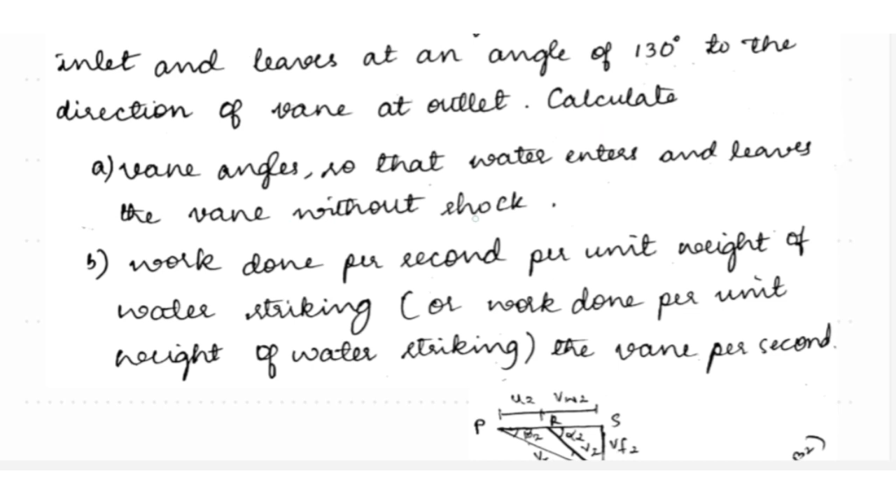angle of 130° to the direction of vane at outlet. So here two angles are given, so that indicates this is unsymmetrical. So you calculate first the vane angles, so that water enters and leaves the vane without a shock. Second, what you have to calculate is work done per second per unit weight of water striking the vane per second, or work done per unit weight of water striking.

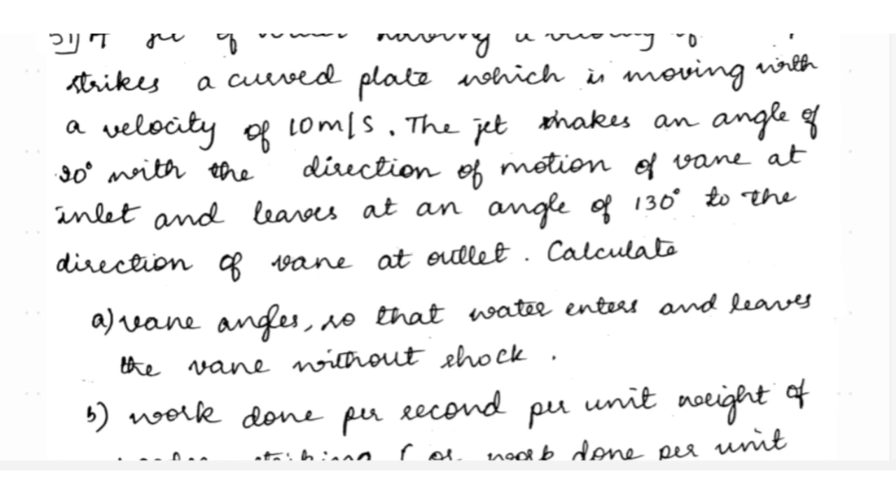So this is the question. What you have to calculate initially is the vane angles, then you have to calculate work done per second per unit weight of water striking.

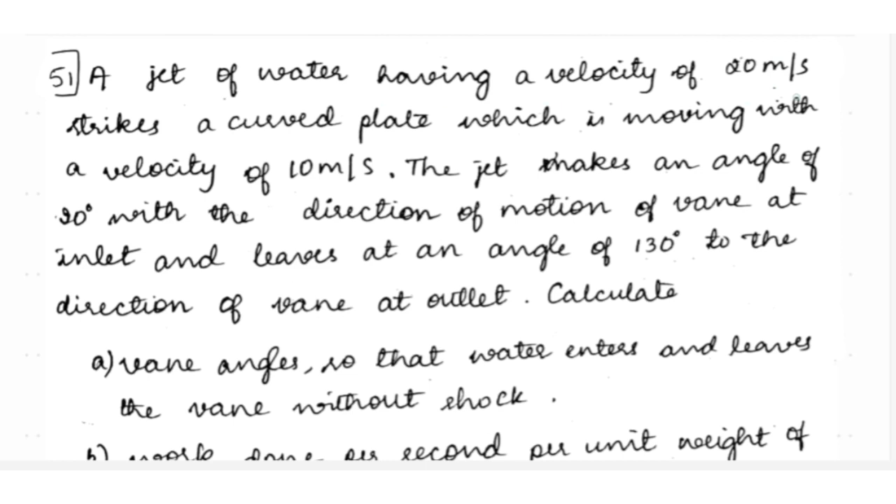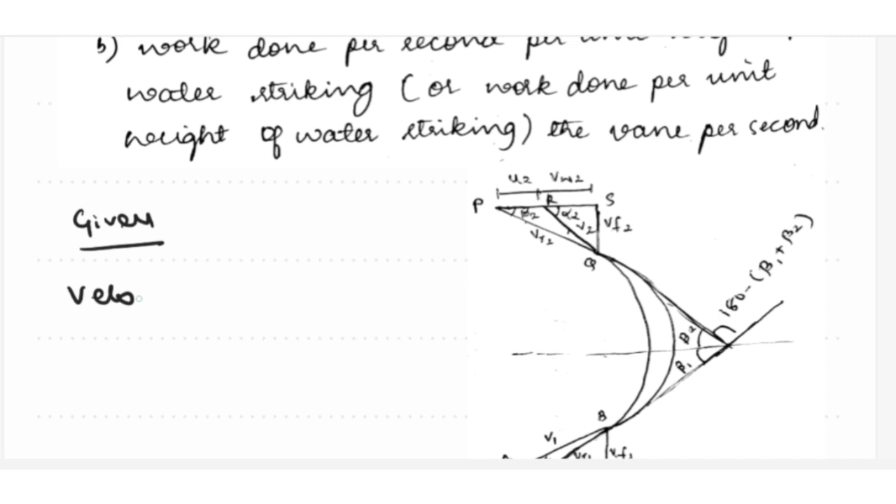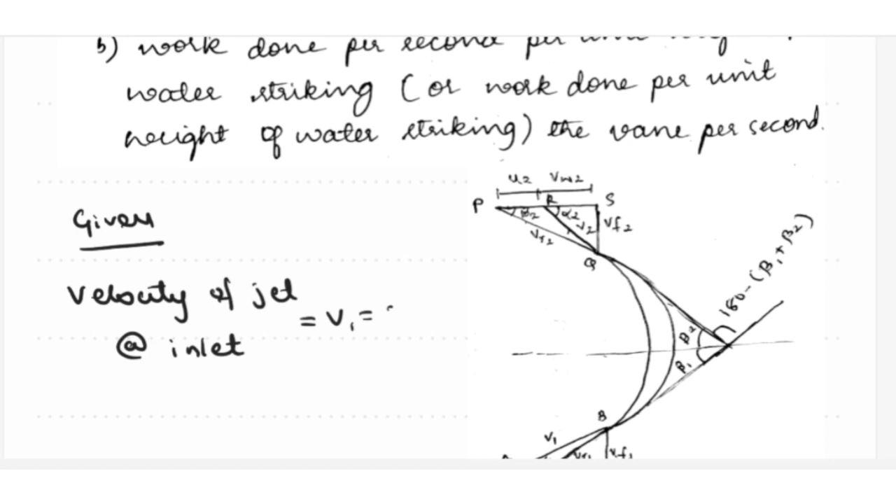So let us write down the given data. A jet of water having a velocity of 20 meter per second - this is nothing but the velocity of jet at inlet. So we can write here: velocity of jet at inlet, V1 is equal to 20 meter per second. It strikes a curved plate which is moving with a velocity of 10 meter per second, so that is the velocity of plate.

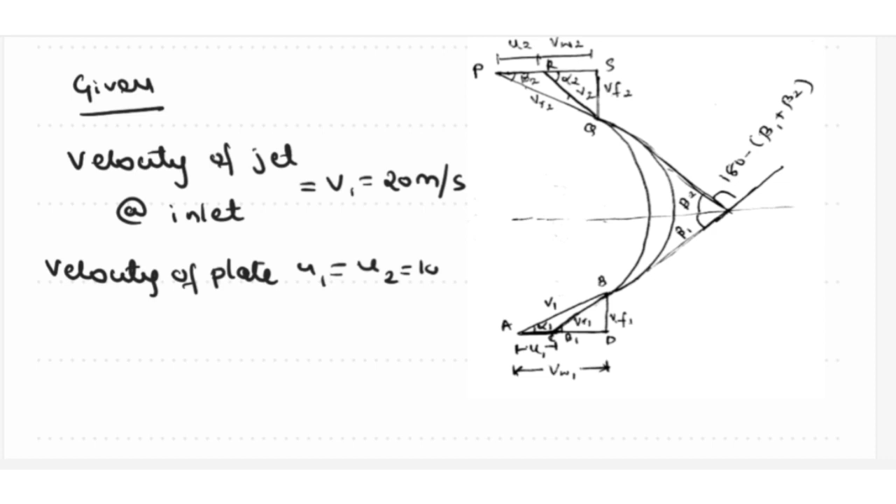Velocity of plate at inlet and outlet will be same, that is what we assume. So we can take it as velocity of plate, that is U1 is equal to U2 is equal to 10 meter per second.

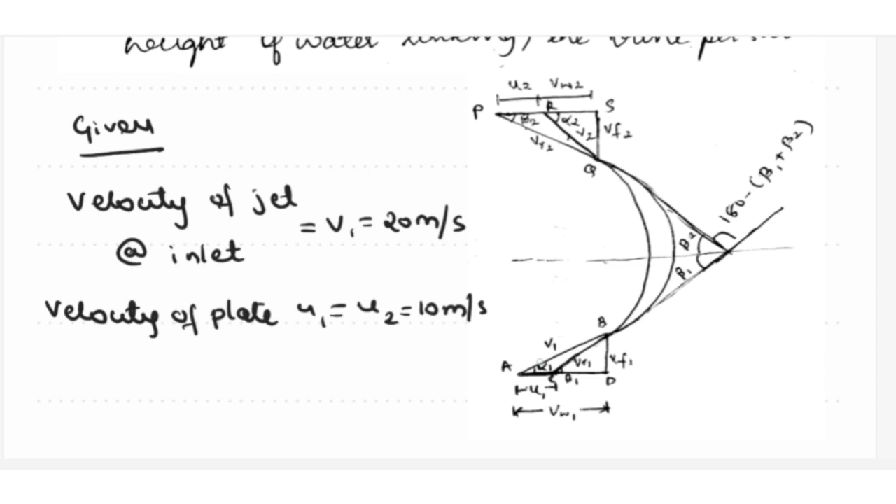The jet makes an angle of 20° with the direction of motion of vane at inlet and leaves at an angle of 130°. So what is this? The jet makes an angle of 20°, so this is nothing but the V1 velocity of jet. It makes an angle of 20° with the horizontal, so that is nothing but alpha 1.

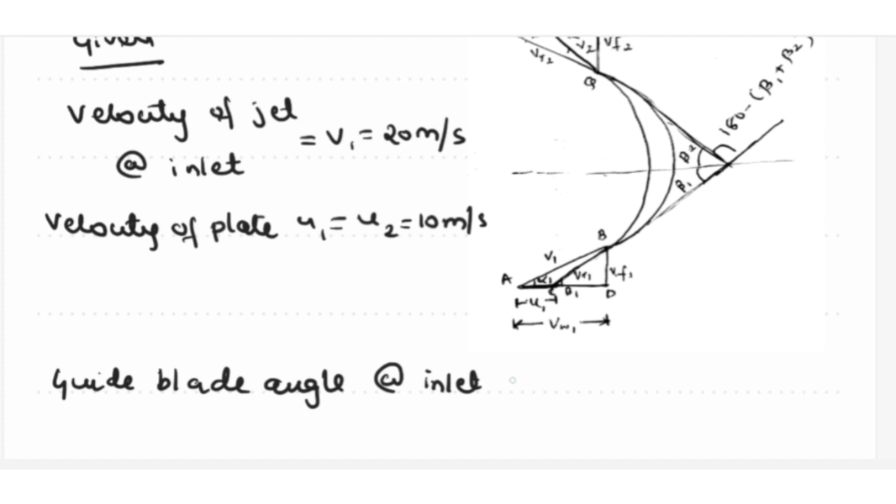So we can write as guide blade angle alpha at inlet, it is alpha 1 is equal to 20°.

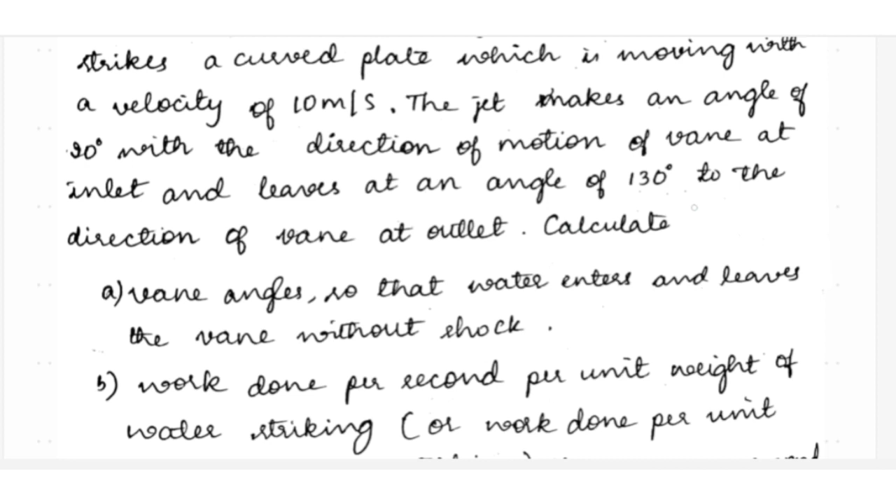That is what they have given here: leaves at an angle of 130° to the direction of vane at outlet. So that is nothing but, while this V2, which is the velocity of jet at outlet, leaves, it makes an angle of 130° here. So this angle I am showing here is 130°, and this is nothing but the guide blade angle at outlet.

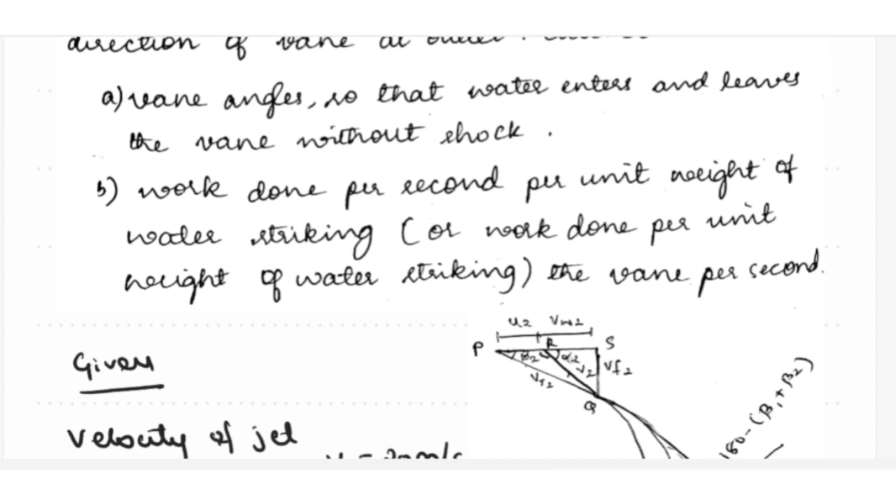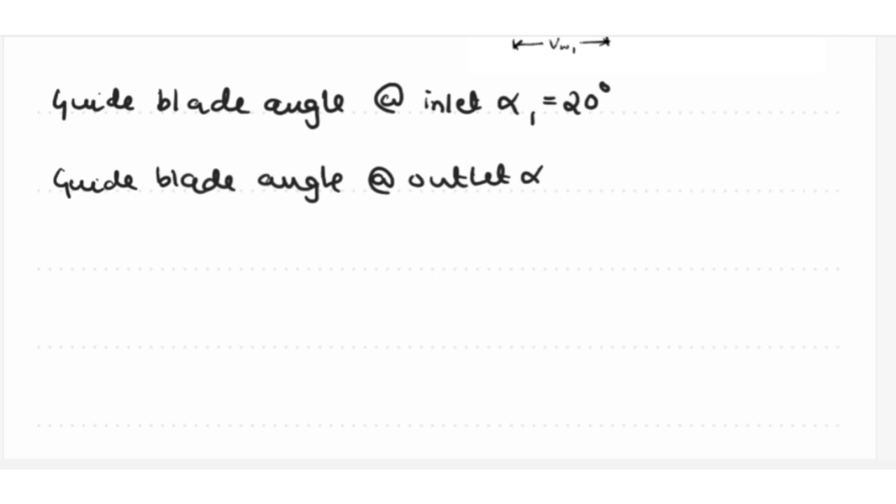So that is alpha 2. Guide blade angle at outlet alpha 2: here this angle is actually given as 130°, so in order to get alpha 2, we get 180 minus 130°, which is equal to 50°.

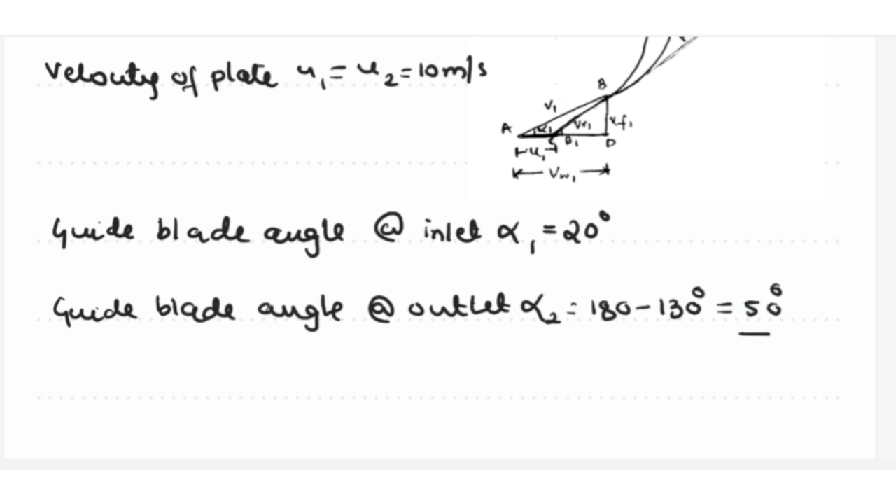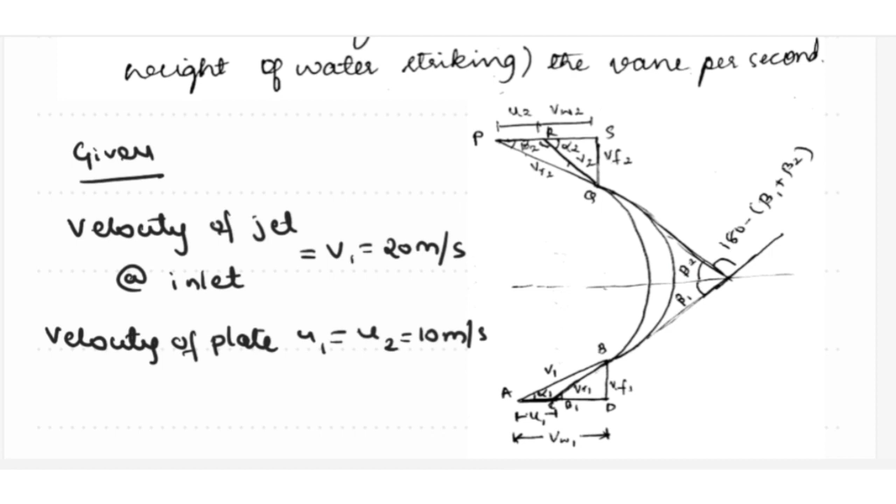Then they have asked us to calculate vane angles, that is what we have to calculate: beta 1 value and beta 2 value. Without shock, that is nothing but they have given VR1 is equal to VR2, relative velocity at inlet and outlet triangle are same.

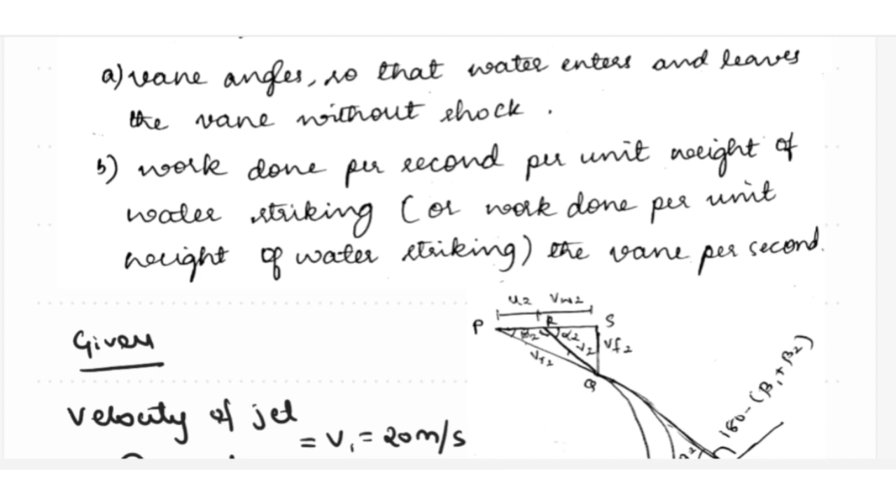VR1 is equal to VR2, since there is no loss of energy or there is no shock. So this is what they have given as given data.

So we have to calculate here vane angles: beta 1 is equal to question mark, beta 2 is equal to question mark. Then we have to calculate what is the work done. So in order to calculate the vane angles, we should know all the velocities at the beginning.

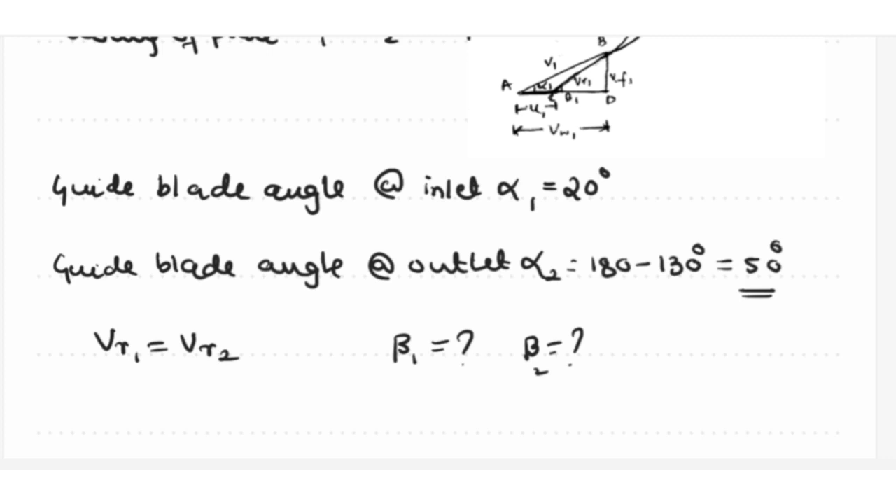So here in this question, V1 is known and U1 is known. So we need a very important term, that is nothing but beta 1. Let us see how to calculate beta 1.

Applying tan to the triangle: tan beta 1 is equal to Vf1 divided by CD. CD is nothing but Vw1 minus U1. So in order to calculate beta 1, we need Vf1 and Vw1.

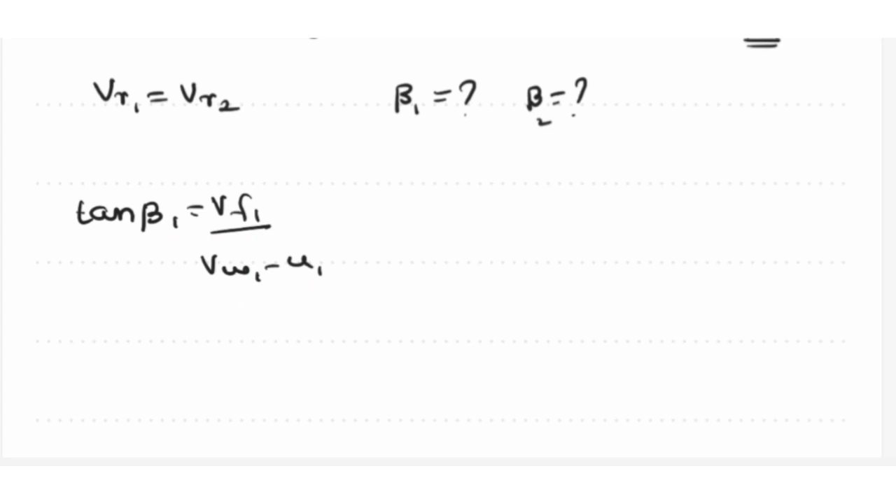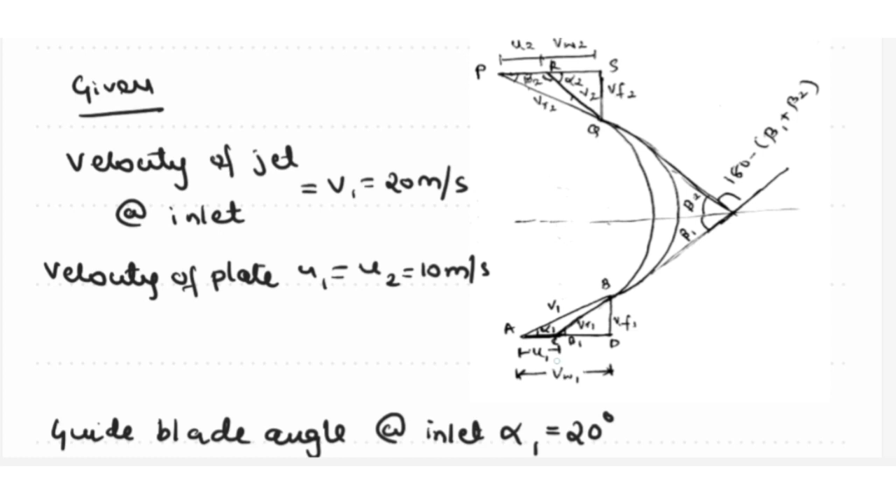So we can calculate it by solving the triangle ABD. Here if I apply sine to this triangle: sine alpha 1 is equal to opposite side Vf1 divided by hypotenuse V1. So Vf1 is equal to V1 into sine alpha 1.

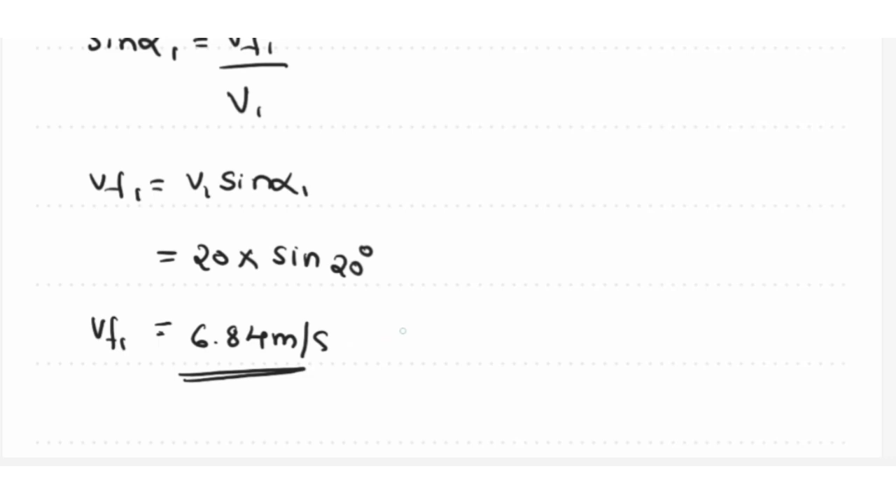V1 is velocity of jet at inlet, so that is 20 into sine of 20 degree. If you solve it, you will get Vf1 is equal to 6.84 meter per second.

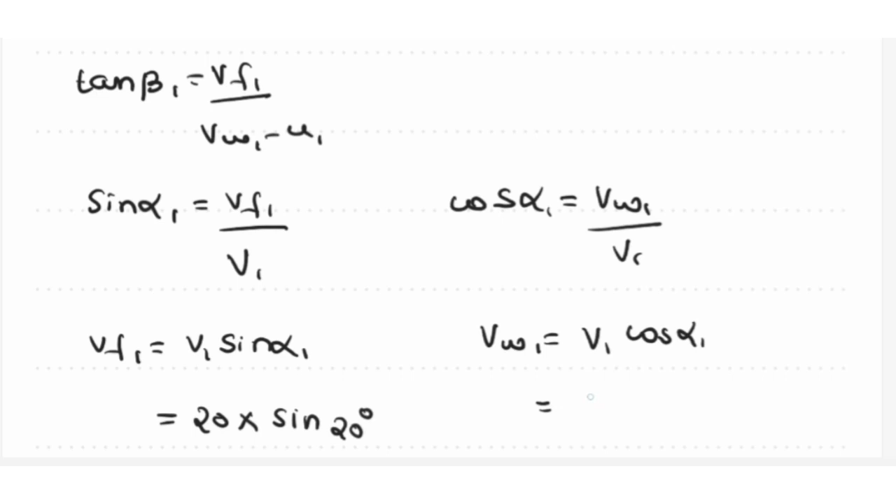Similarly, if we apply cos to the same triangle: cos of alpha 1 is equal to adjacent side Vw1 divided by hypotenuse V1. So Vw1 is equal to V1 into cos of alpha 1. Substituting, 20 into cos of 20 degree.

So that is, we'll get Vw1 is equal to 18.79 meter per second. So now we got Vf1 and Vw1.

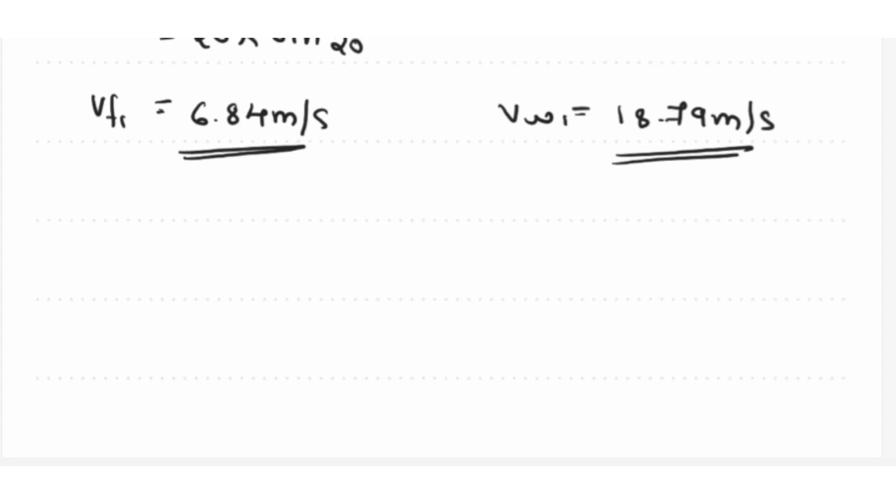So you can calculate here the beta value. So tan beta 1 is equal to Vf1 divided by Vw1 minus U1. So Vf1 is 6.84, Vw1 is 18.79, minus U1 is 10. So we have to solve this. We will get beta 1 is equal to 37 degree

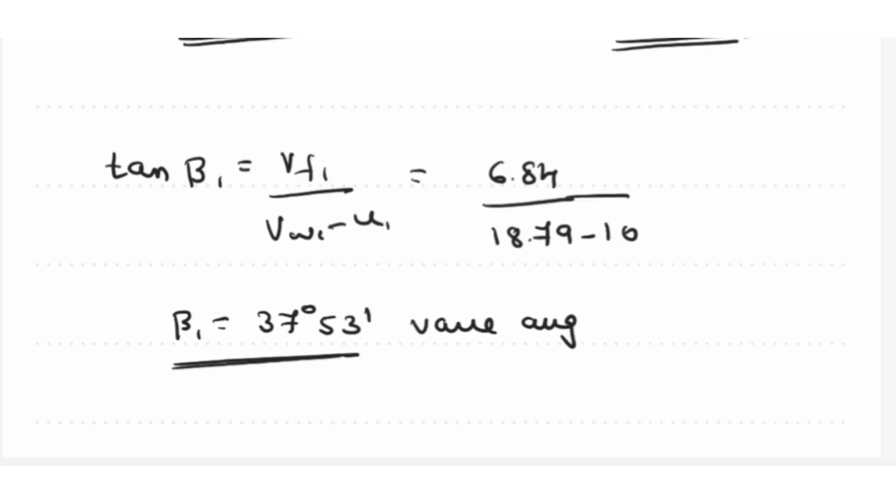53 minutes. So this is nothing but Vane angle at inlet.

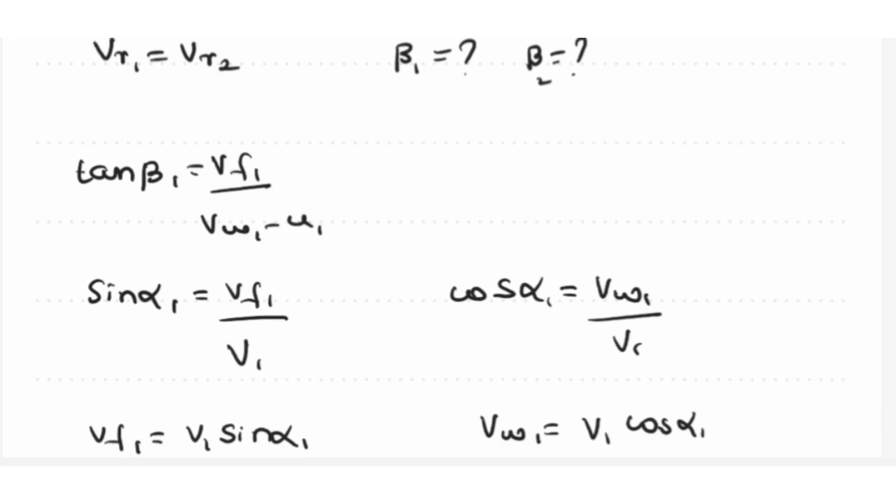So similarly, we have to calculate Vane angle at outlet also. So if you look at the outlet triangle, here only one velocity, that is u2, is known. All other velocities are unknown, and even this angle is also unknown.

So in order to calculate, or in order to shift from the inlet triangle to the outlet triangle, there is one hint. That is, relative velocity at inlet is equal to relative velocity at outlet. That is VR1 is equal to VR2, because there is no shock. So in the question it is given there is no shock, so therefore there is no loss of energy. So VR1 is equal to VR2.

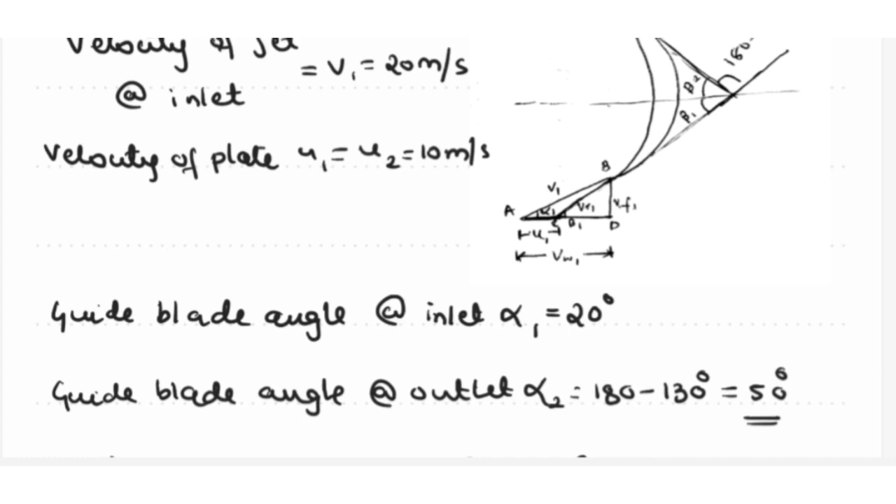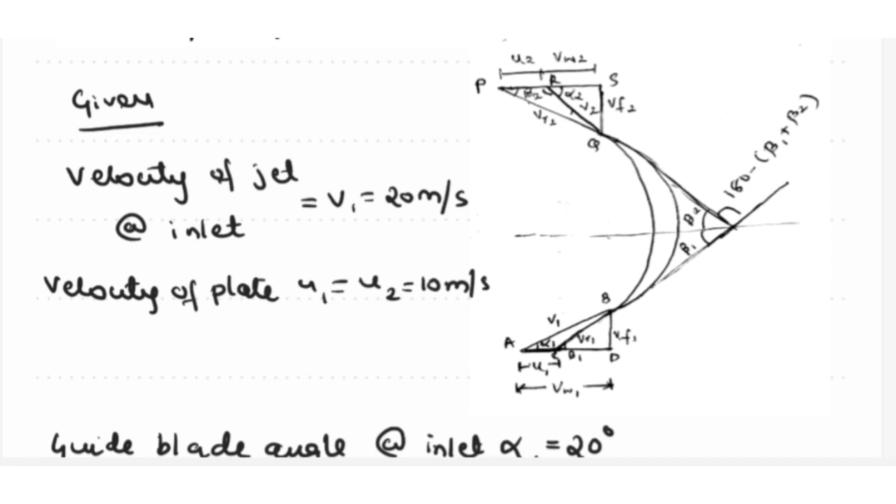So we can calculate VR1. So in order to calculate VR1, let us see how. We apply sine to this triangle BCD. So sine of beta 1 is equal to, opposite side is VF1, and hypotenuse is VR1. So that is equal to VF1 divided by VR1. So VR1 is equal to VF1 divided by sine of beta 1. Here VF1 we have already calculated and we got the answer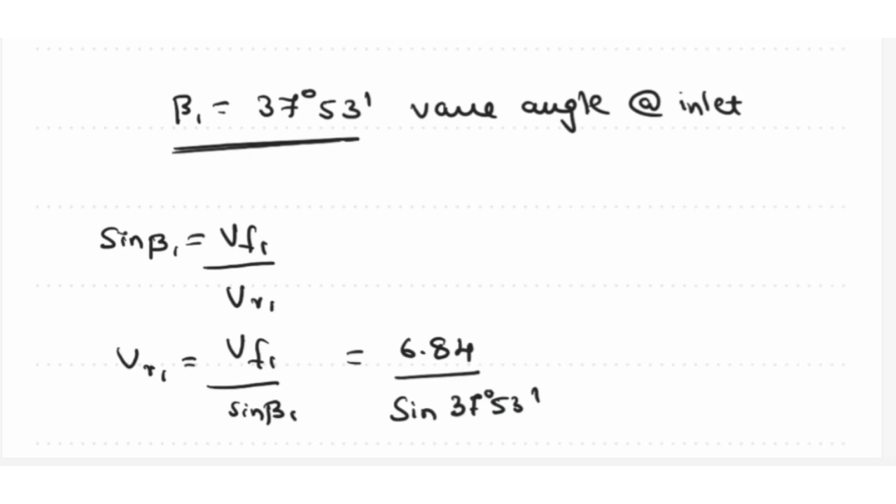6.84. So sine of beta 1 is 37 degree 53 minutes. So you can calculate it and you can get the answer VR1 is equal to 11.13 meter per second. So that is equal to VR2.

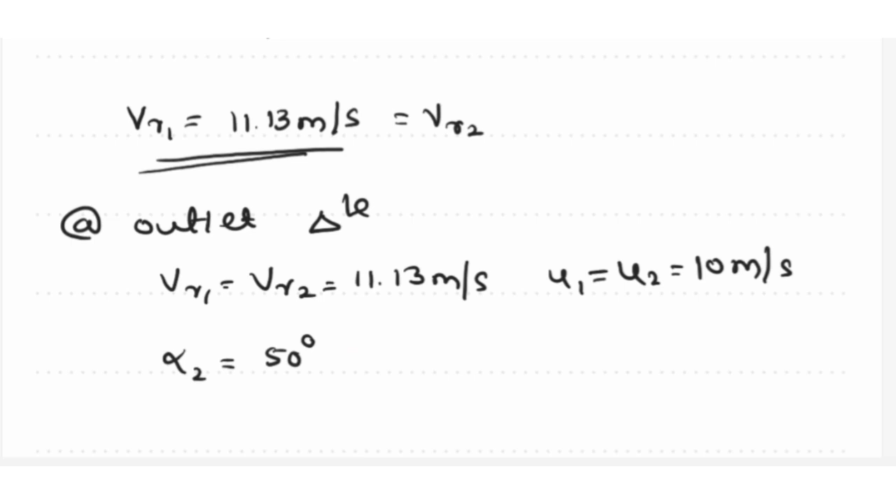So if you move to the outlet triangle, VR1 is equal to VR2 is equal to 11.13 meter per second. So that is what they have given, and U1 is equal to U2 is equal to 10 meter per second, and one more is alpha 2 is 50 degree. So let us solve the outlet triangle.

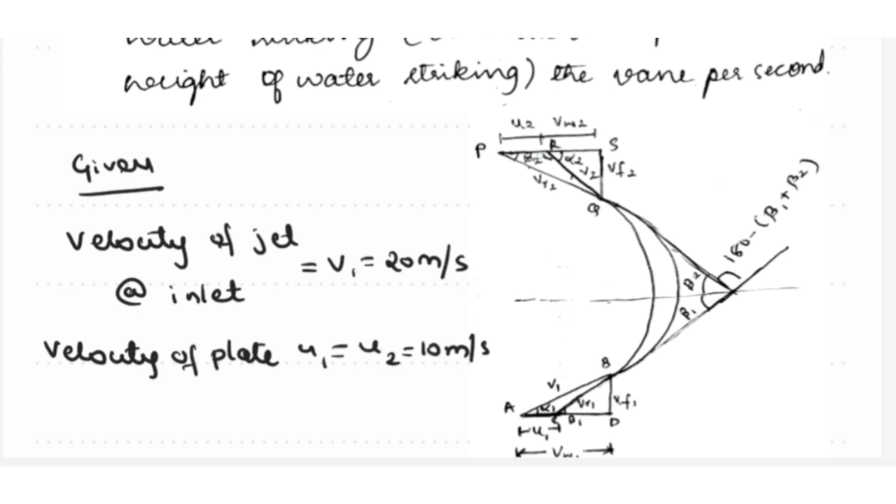So in the outlet triangle we should calculate what is beta 2. Beta 2 is nothing but vane angle at outlet. So in order to calculate beta 2 we should apply sine rule to the triangle PQR. So applying sine rule to the triangle PQR, I am applying sine rule now.

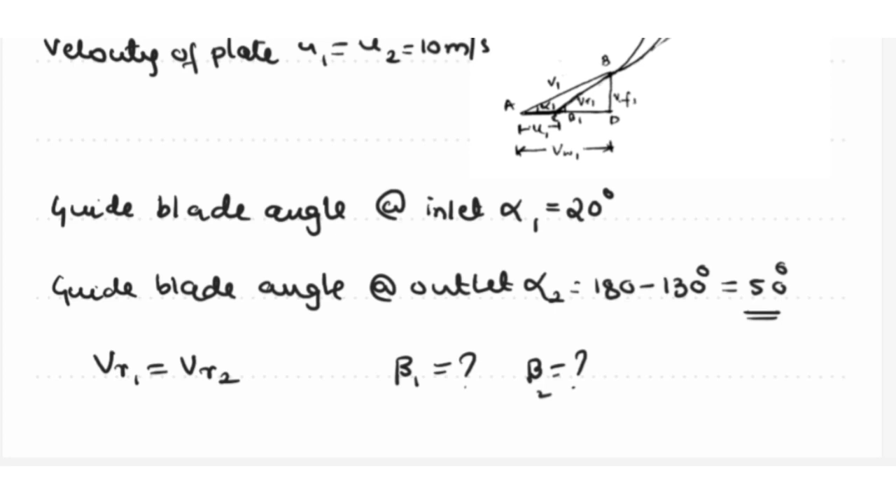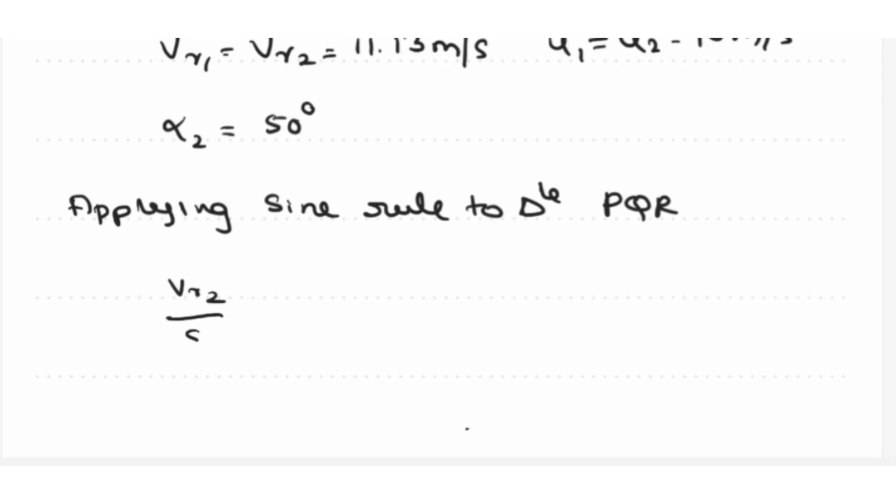So that is VR2, which is known, divided by sine of the opposite angle. So that angle is given in the question as 130 degree. So VR2 divided by sine of 130 degree is equal to, and another known thing is U2. So U2 divided by sine of this angle, which is 180 minus beta 2 minus 130.

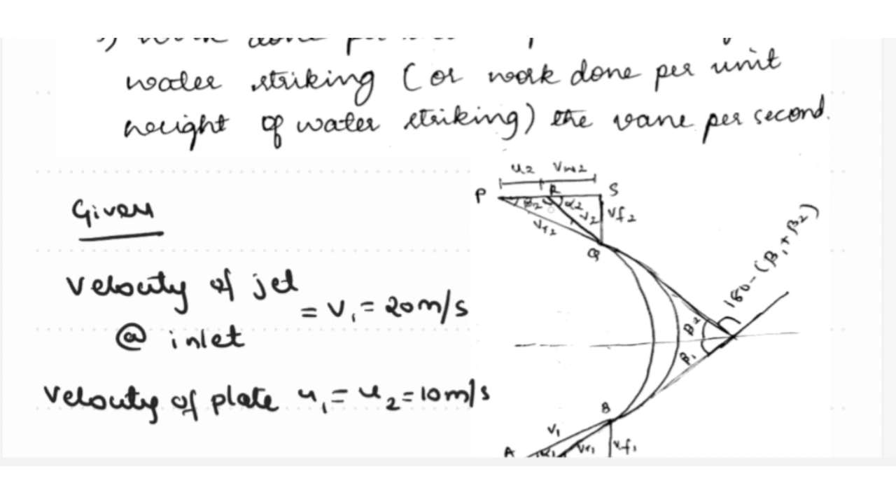So U2 divided by sine of total angle is 180. So one angle is 130 and the remaining one is beta 2. So you should substitute all the values here.

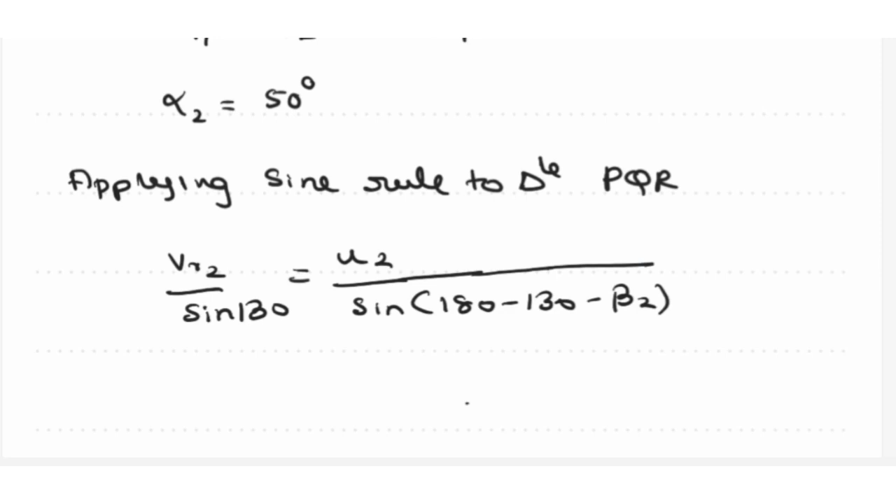So VR2 is known here, that is 11.13 divided by sine of 130, is equal to U2 is equal to 10, sine of, so 180 minus 130 is 50 minus beta 2. So you have to solve this. So you will get beta 2 is equal to 6 degree 30 minutes.

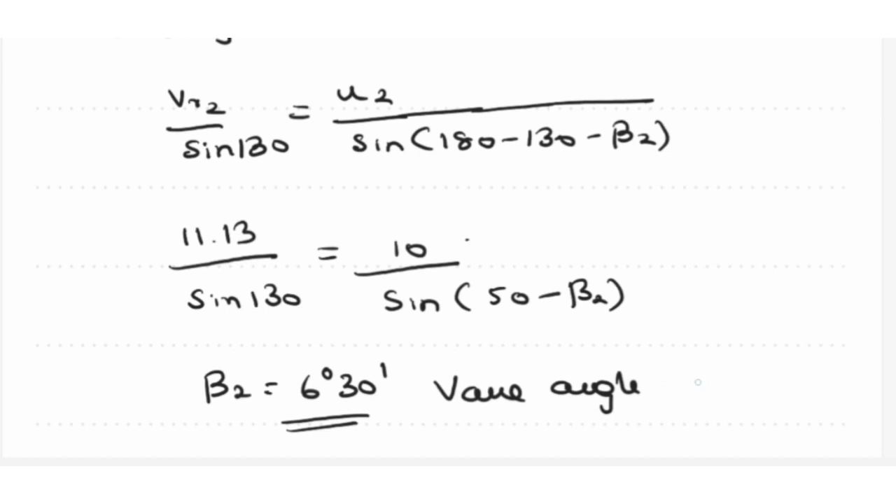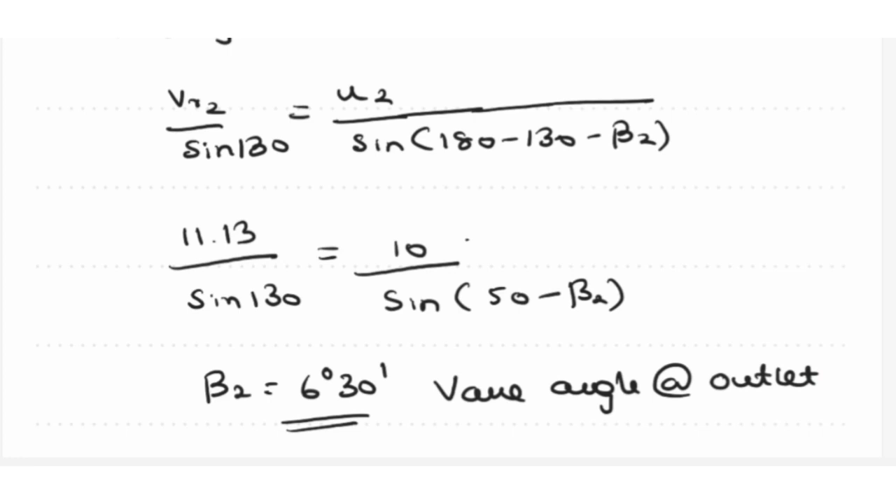So that is vane angle at outlet. So now we have calculated the vane angles at inlet and outlet. So now we should calculate what is work done. So in order to calculate work done, we should know what is VW1 and VW2.

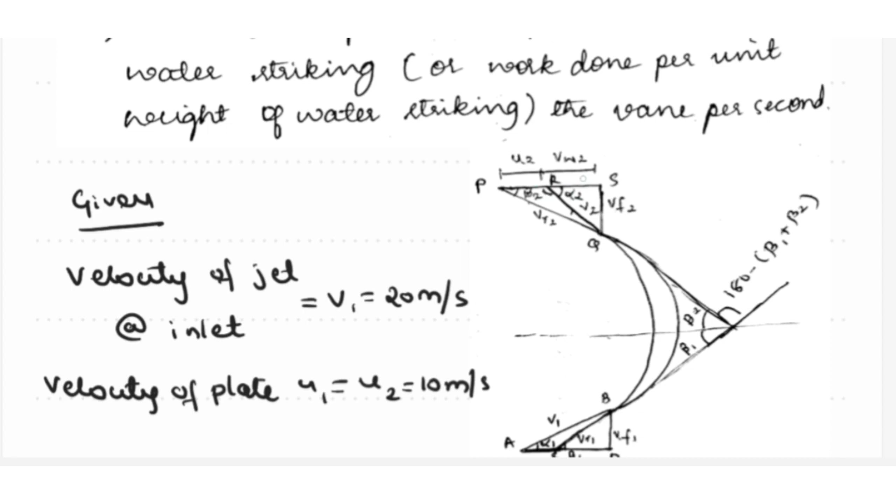So we have calculated VW1 at the beginning, that is 18.79. Similarly, we should calculate what is VW2 here. So VW2 you can calculate by referring to the outlet triangle. So considering the triangle QPS, now I will apply cos beta 2.

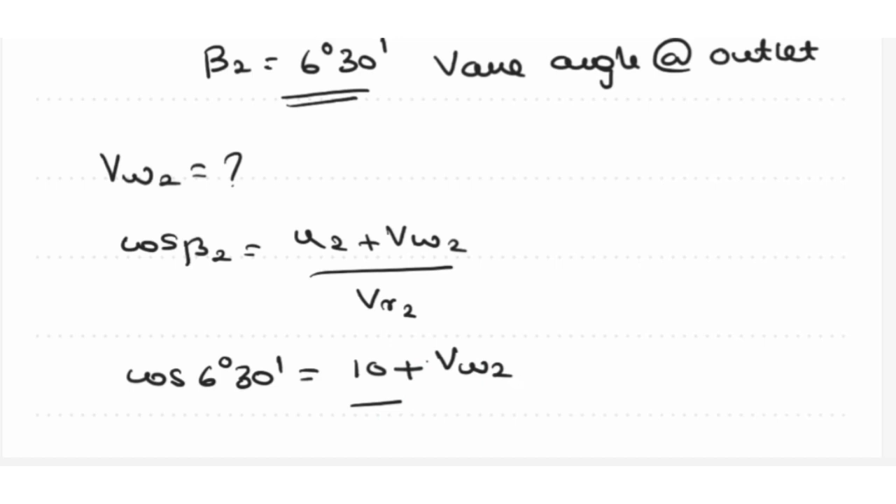So cos beta 2 is equal to adjacent side U2 plus VW2, divided by hypotenuse VR2. So here almost everything is known. Cos beta 2 is 6 degree 30 minutes, U2 is 10, VW2 is unknown, and VR2 is 11.13. So if you solve this substituting the values, you will get VW2 is equal to 1.05 meter per second.

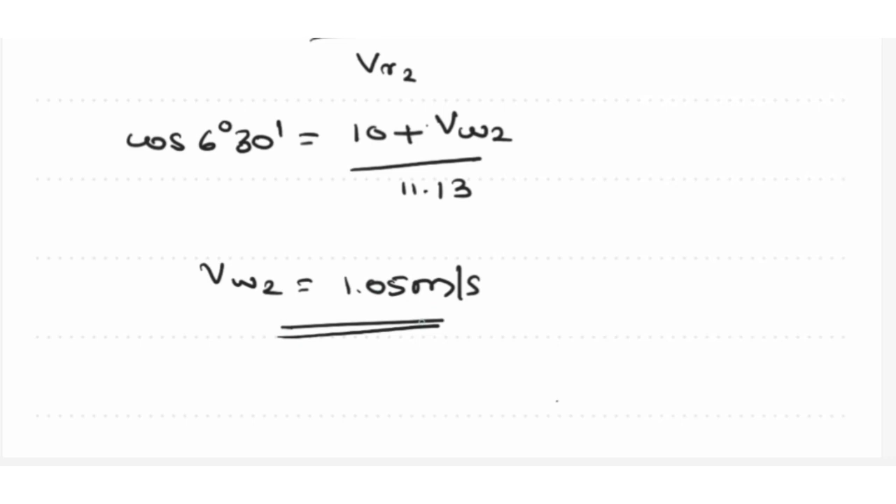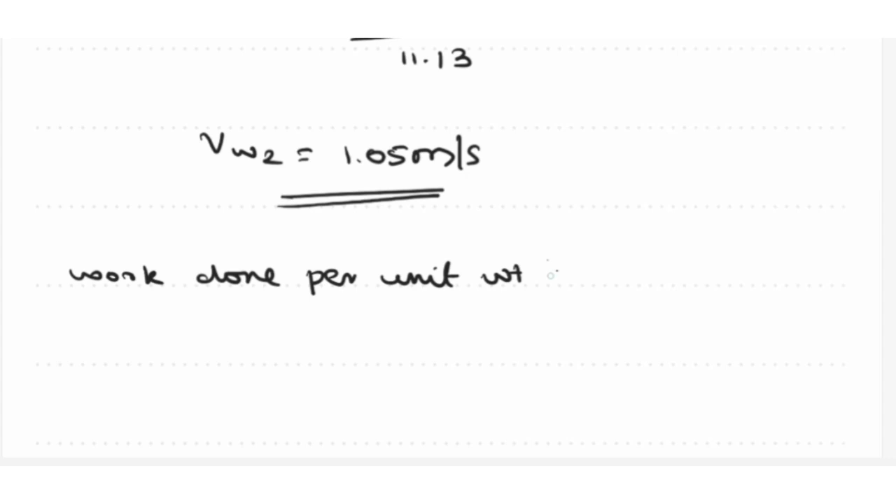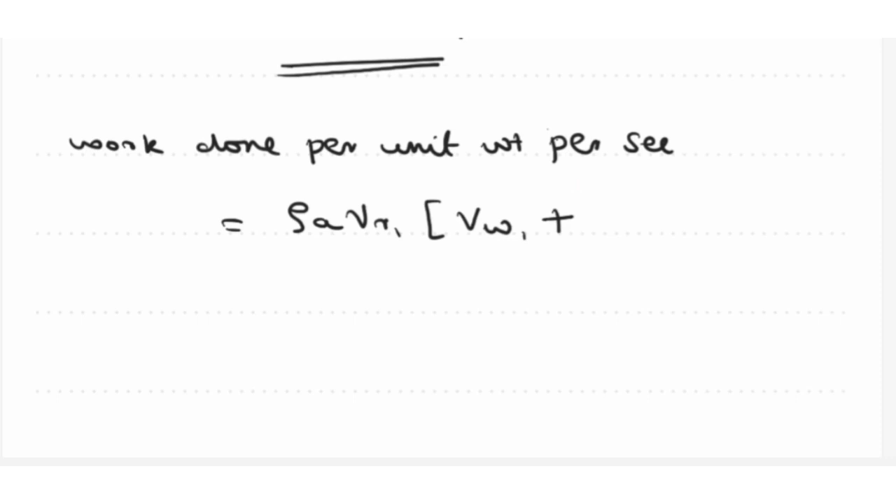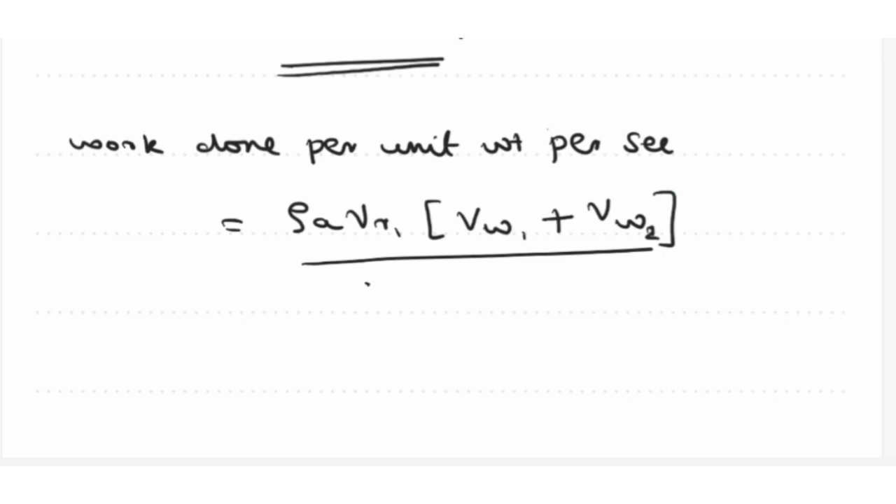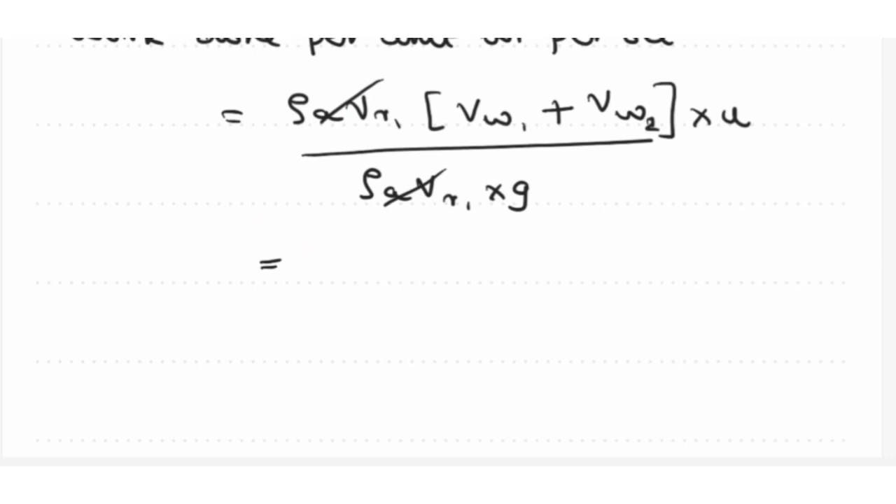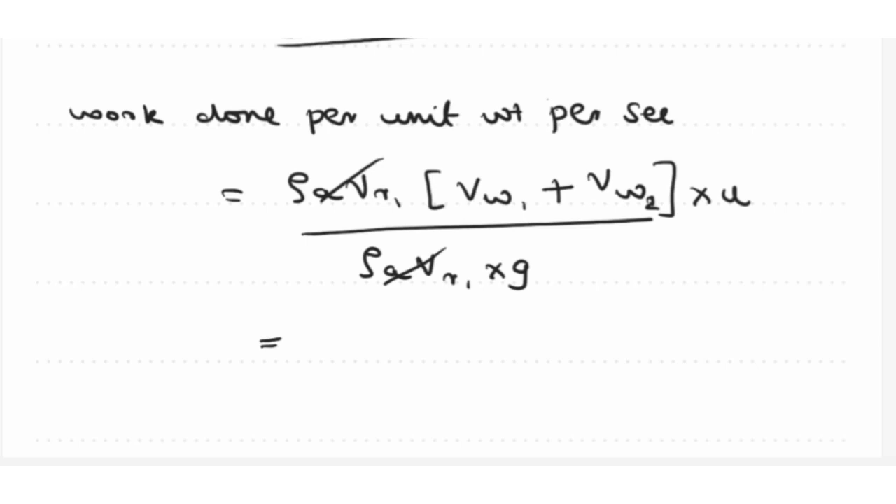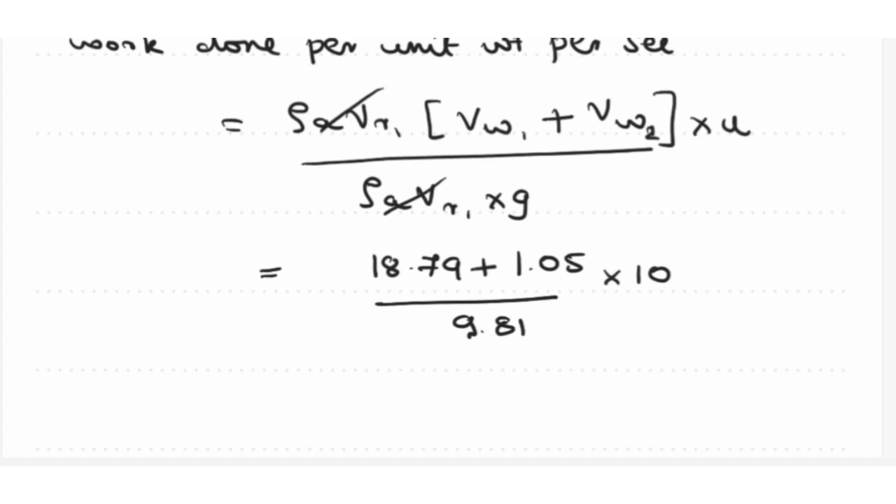So it will be cancelled substituting all the values. So VW1 is equal to 18.79, VW2 is 1.05, divided by 9.81, into U is 10. So you have to solve this, and that will be equal to 20.22 Newton meter per second.